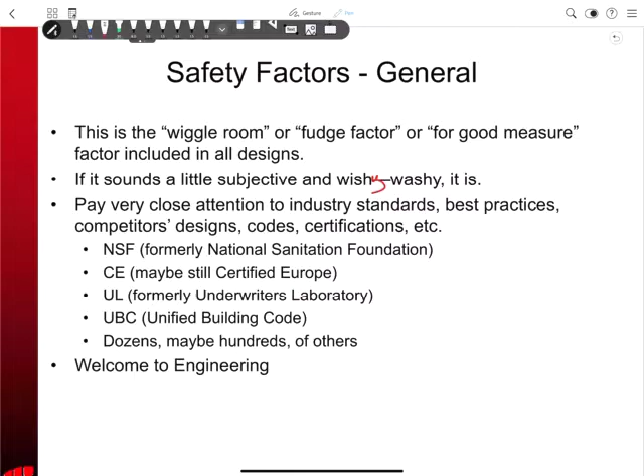Some places to look. NSF, it used to be called the National Sanitation Foundation; things that could make you sick are kind of governed by the NSF. CE, Europe has their own thing for being certified safe in Europe. Underwriters Laboratories, kind of the equivalent here in the States. Unified building codes, right? They used to vary from county to county, state to state, but now across the country, the building codes are all kind of unified. And there's dozens, maybe hundreds more. So if this is overwhelming or scary or not concrete enough to you, welcome to engineering.

In engineering, there aren't always right answers. I try to stress that in video number 1. So you have to do the best you can, justify the decisions you make, document the decisions you make, document the mistakes you make, right? This is all critical. All right, good. Next slide.

Safety factors, selecting the safety factor, right? The first thing is the degree of uncertainty on the loading. Now, the example I always like to use are the old piers down at Memorial Union, Hoofers Sailing Club. They were designed and built by some engineering students years ago, a bunch of volunteers. They said, well, how many people are going to be on this pier on a busy, beautiful Sunday afternoon in the middle of July? Sure, there could be 20, 30 people on this pier. And so they designed the pier for 20 or 30 people. This is the worst case scenario on a busy Sunday afternoon, right?

But what they didn't think about is 4th of July. Everybody goes down to the Union to watch the fireworks. And where's the best place to see the fireworks? They packed 300 people shoulder to shoulder, crammed out onto the pier. The engineers didn't think of that. They thought about what's reasonable. People aren't reasonable. And of course, I shouldn't laugh. The pier collapsed, and I think a woman broke her leg. One kid fell in the water, almost drowned because they didn't know how to swim, but yet they're standing on a pier. No PFD. So there's a degree of uncertainty in the loading.

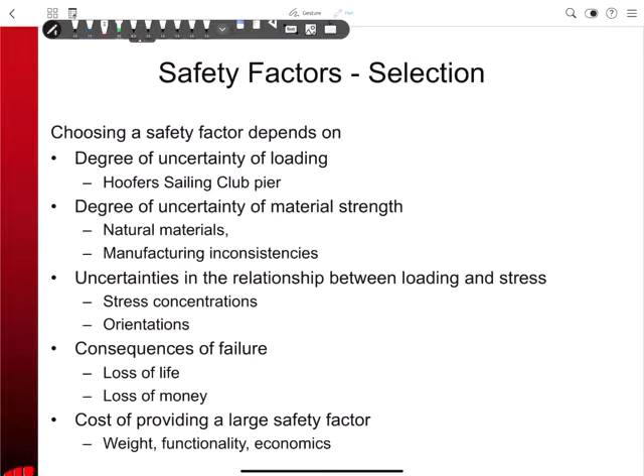And now here's another important one, the definition. Now the definition we've done so far is, N is the material strength. So this is kind of the way the engineer looks at it, the engineer approach.

I say, well, how strong is the material, and what is my expected stress? And hopefully my material strength is greater than my expected stress, so I have something greater than 1. Okay, good. How much greater than 1? I don't know, let's say 40%, right? So a safety factor of 1.4, because that's the strength compared to the stress.

But there's another important way we have to look at this, and that is the safety factor from a user standpoint, right? What I mean is the load to just cause failure compared to the expected load. And it's like, well, that's the same thing. Right, let's see if we can come up with an example that's not the same thing. As long as we're kind of on an automotive theme today, how about if you have an energy absorption, so here's a brick wall and this is a car. If it's not obviously a brick wall and a car, that's what it is.

There goes, you see the lobster boat out there? Yeah, there goes the lobster boat, going out to get some dinner.

So here's this car, for that matter, maybe a boat, I don't know. And here's a brick wall. And I impact this, and there's a certain amount of momentum, kinetic energy, whatnot, and then there's going to be certain stresses on the front end of the energy absorption portion of this.

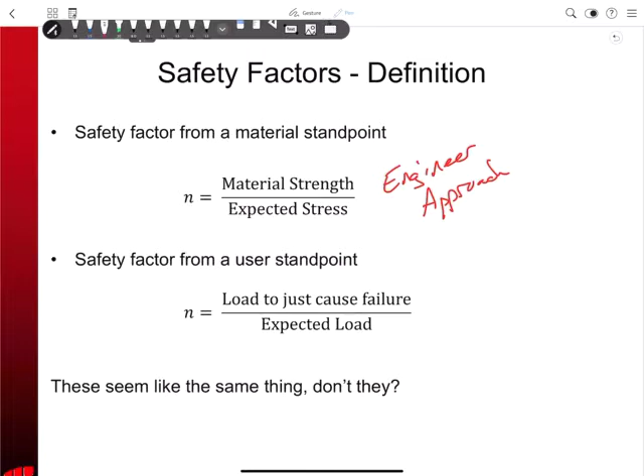Okay, so that's something that most people don't really think about a lot. But the user, they're thinking speed. The engineer is thinking about stress and strength, right? So they're not the same. You have to communicate very well how you're defining the factor of safety.

Okay, so now let's get into a little bit here. We've got this safety factor of a diving board. So we've got the board cross section here. So if I were to draw, let's do this in black maybe. We do this, out here and here. How wide is this thing? 50 centimeters. And then it's 8 centimeters thick here. And then the 100 kilogram engineer stands at the end, right? It's nice that I'm 100 kilograms because it makes really good props. So this works out to be 980 newtons.

They're standing down there, and then I do a moment balance. So this is pushing up. How much? This is pushing down with 980, right? And so everybody should be able to do this by now, and discover that the force at the roller is 3,400 newtons. Whoops, get back there. So F equals 3432 newtons, right? And then we take the 980 times this 5 meters, and then we get the moment about the roller.

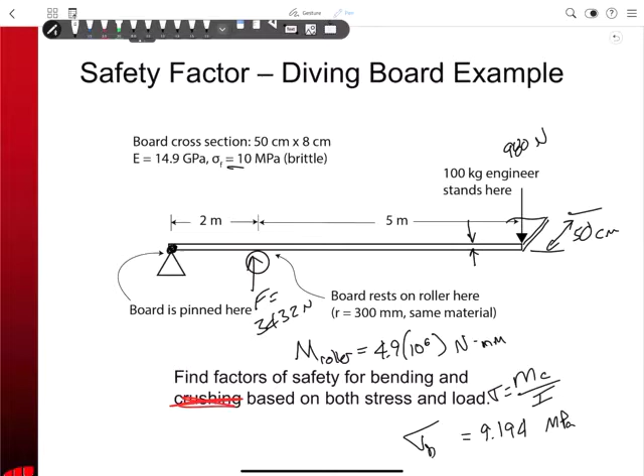Do I have an MC over I? And the bending stress works out to be, what does it work out to be? 9.194 megapascals. 9.194 megapascals. All right. So that's the bending stress. So sigma bend, right? Okay, so bending stress is that.

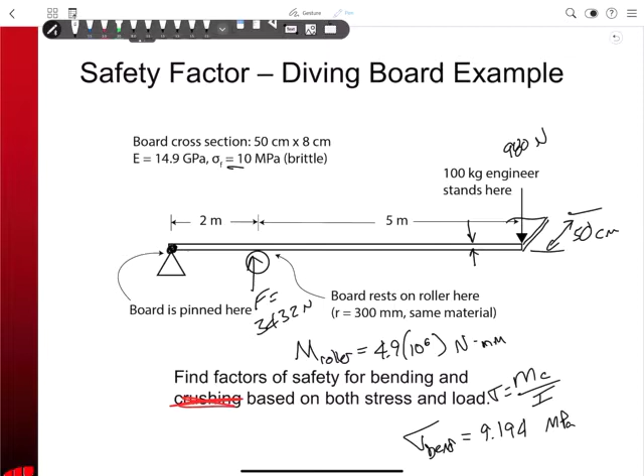And I look at this 10 megapascals versus 9.194 megapascals, in the back of my mind I'm thinking, this is not the best diving board. But, right, it's less, right? 9.194 is less than 10, so this thing should be fine. All right. So let's go here.

So we discovered that this diving board is in fact safe because it's only 9 point something for bending and it's 10 for fracture, so we should be fine, right? But there's always a but in engineering. There's always some unknowns. You're engineers, not scientists. Not all engineers are 100 kilograms. In fact, most of you are probably not. I should not be 100 kilograms. I should be less than 100 kilograms. There might be more, right?

So the mean, mu is mean. This is the Greek letter mu for mean, which equals average, right? The average engineer is 100 kilograms, but there's some standard deviation of the engineer. So this is standard deviation. The standard deviation of an engineer might be 12 kilograms.

Okay, and then the fracture strength of the board, sure, the average board is 10 megapascals, right? But there's also some standard deviation to the strength of this board. It might be made out of wood, right? And trees, natural fibers, are somewhat unknown. So we have to consider that there's variability in engineers, or divers, swimmers, recreators, and there's variability in the diving board materials, right?

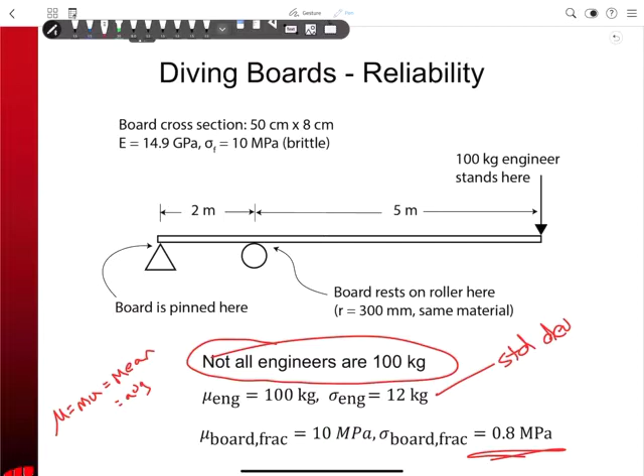All right, okay, good, I almost tipped over. I'm standing on really wobbly rocks here, so I just about lost it.

So for here, we need this to be greater than 1. Right? It needs to be at least as strong as it needs to be. And then this just has to be positive. Right? My strength has to be greater than my stress. So the margin of safety just needs to be positive. The factor of safety needs to be greater than 1. All right. Now, a quick little review on the normal distribution.

This thing here is the mean. Right? The mean is there. That's the most likely one, the one that happens the most. Well, in this case, the mode and the mean are the same. But that's the average, right? And then the farther out we go, so if I'm 1 standard deviation above, that's roughly 34% there, and then 2 standard deviations is another 47%, blah, blah, blah, and this keeps going up.

So this picture tells me how likely is something to be, for instance, 3 standard deviations above the mean? Not very much, right? So Olympic athletes, professional athletes, Nobel Prize winners, they're all like 3 standard deviations above the rest of us schleps that are just trying to get by. And then, of course, there's some things that are way below, right?

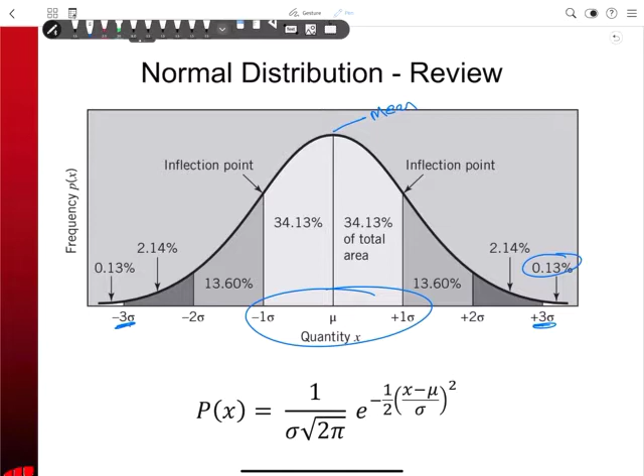Something that's just bad luck and something failed because it happened to be 3 standard deviations below whatever the mean is, right? But most of us live right in here, plus or minus a standard deviation in most aspects of our life. 68% of people on all traits are between plus and minus 1 standard deviation. All right, so hopefully you remember this from stats, but it's a nice little review.

Next one. Okay, so now we're going to treat the margin of safety as a normal variable. So now that I'm looking at this, it seems like we could have done a better job. Let's look at this one. Okay, so the margin of safety, Z, we know that the mean margin of safety is just the mean strength minus the mean stress, right? That makes sense.

But this is mind-boggling to me here too, that the standard deviation of the margin of safety works out to be the sum of the squares of the standard deviations of the other 2 things. Okay, and I'm going to work through this example, so hopefully this makes more sense, right?

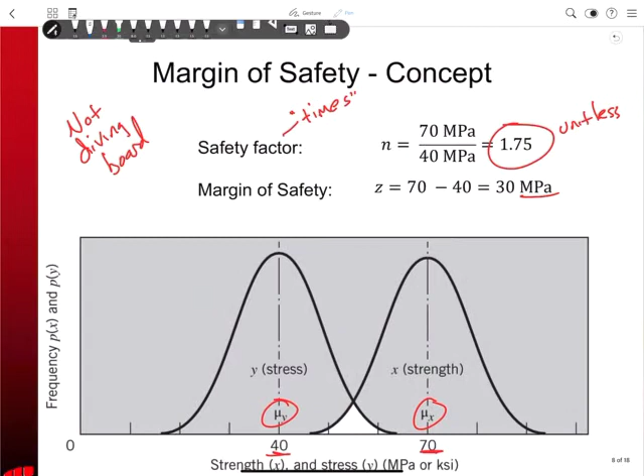So if we look back here, we saw that in this example, the margin of safety was 30, right? I don't know much about the standard deviations here, but then I go forward to here. This is the mean margin of safety. Of course, there could be some margins of safety that are really good, and there could be some that are less than that, right? In fact, what happens when the margin of safety is down here? What does that mean?

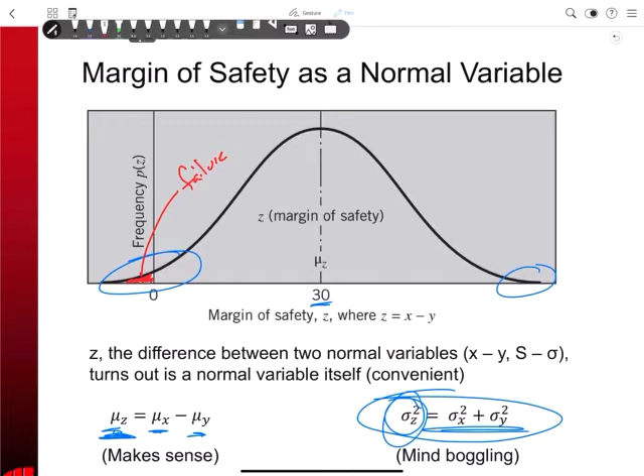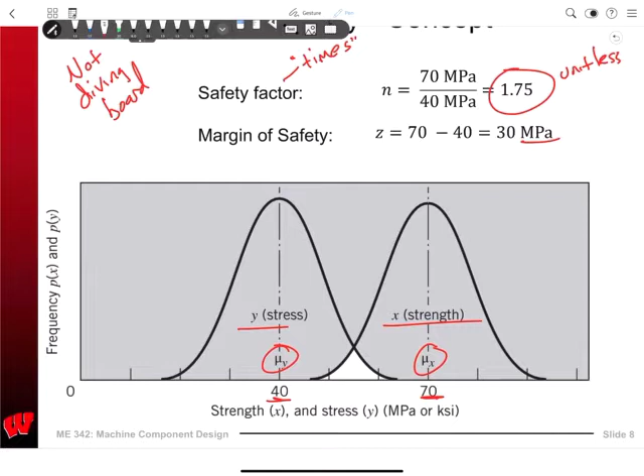When the margin of safety is down there, oh, that's bad. That is failure, right? It's just bad luck. Bad luck, because here, now, what the heck? This made total sense when I was putting this together. Oh yeah, so this is the case where I just happened to get a weak thing and then a heavy load, and they crossed and it broke, right? So that's what happens when the margin of safety goes red, or when it goes below 0.

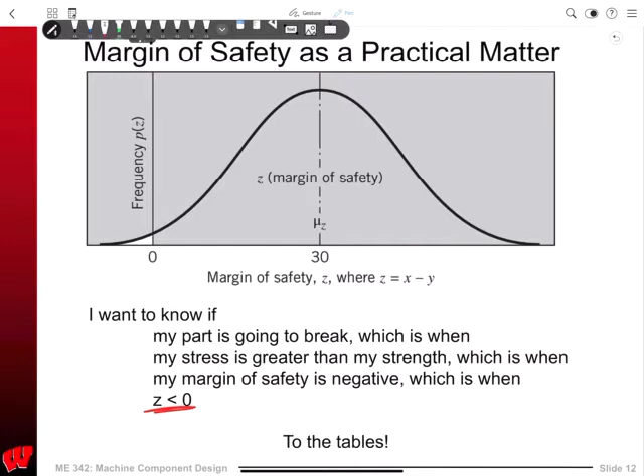Okay, so I want to know if my part is going to break, which is when my stress is greater than my strength, which is when my margin of safety is negative, which is when the margin of safety is less than 0. Okay, so we're not quite ready to go to the tables yet. We still have to work on this a little bit. Not all engineers are the same. So I've given some standard deviations here, and I've given this. So let's take a look.

My standard deviation, and because sigma shows up for stress and standard deviation, my standard deviation for my margin of safety is going to equal the square root of the standard deviation of bending squared plus the standard deviation of the fracture strength squared. Okay. So I need to know the standard deviation of my bending stress. That's a little bit inconvenient because I know the standard deviation of the mass of an engineer. I don't know the standard deviation of the bending moment, right?

But fortunately, the bending stress, sigma bend, is directly proportional to the mass of the engineer, right? So that means that the standard deviation of the bending stress is directly proportional to the standard deviation of the engineer, right? So then I can write that the standard deviation of the bending stress is going to equal

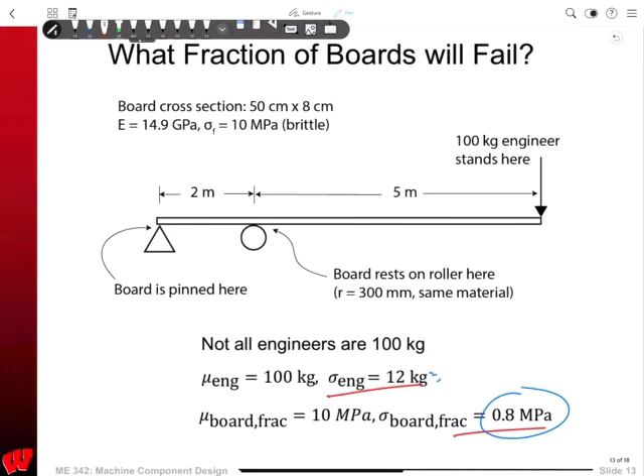My standard deviation works out to be, what is this? 1.363. And that's my margin of safety, so that's megapascals. Okay. Oh, so now this is getting to be a little bit interesting, right? So my mean margin of safety, where did that go? Is 0.8059, right? But my standard deviation of the margin of safety is 1.363.

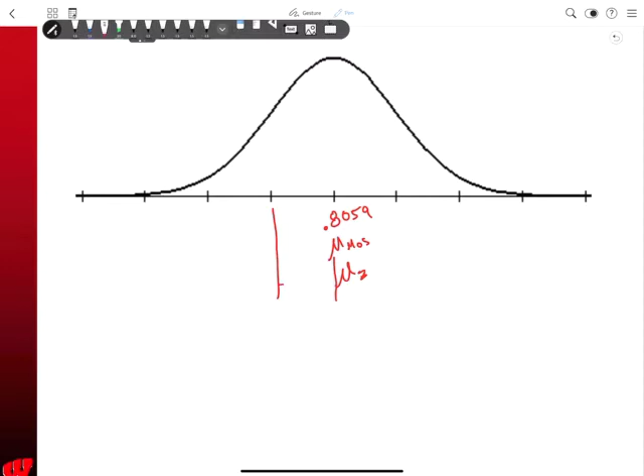Okay, so what does that mean? That means that my mean here is 0.8059. Right? Because that's my mean margin of safety, or my mean Z, okay? But I have to go only one standard deviation below this distance right here. This distance right here is the standard deviation of my margin of safety, which is 1.3.

I should have done all this in blue. What does that mean? So it's 0.8059 in the middle, it's 1.3 there, which means that all this stuff over here is a failure. This is all red. Right, because here's zero. Wow, so a lot of these are gonna fail. How much of these are gonna fail? Well, we gotta look that up, so we gotta go to the tables for that.

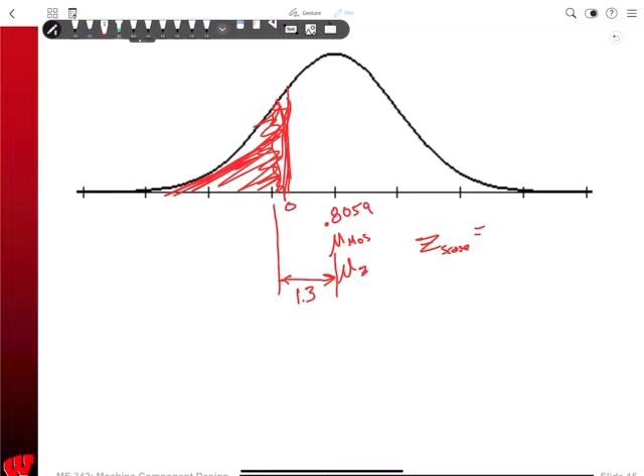So what this table shows us is what is the shaded area, right? That's what this table answers. But it's given in standard deviations, which I didn't figure out yet. Okay, so I know that my margin of safety is only 0.8059. So I need my z-score, which equals 0.8059 divided by my standard deviation, which is 1.363, right?

So my z-score is only, let's see, where did I write that down? Oh, I didn't write it down. So it's roughly 0.59, I think it was. I think it equals 0.59. Can't believe I didn't write that down. Okay, so I have only 0.59 standard deviations below my mean margin of safety before I get into the negative margins of safety, which means it's going to fail, right?

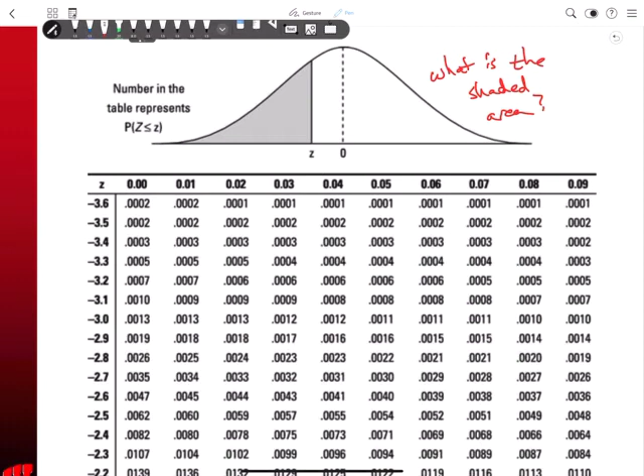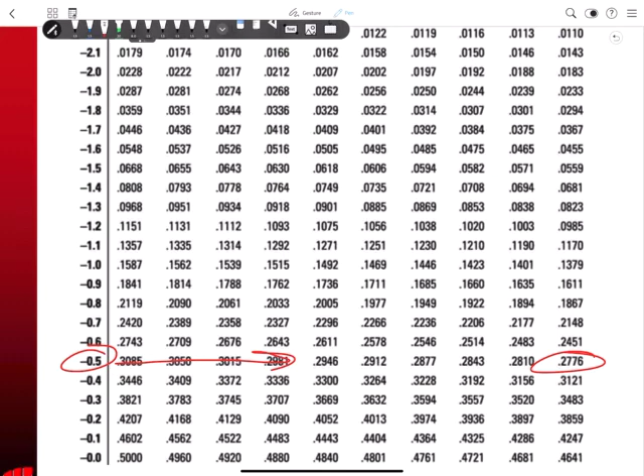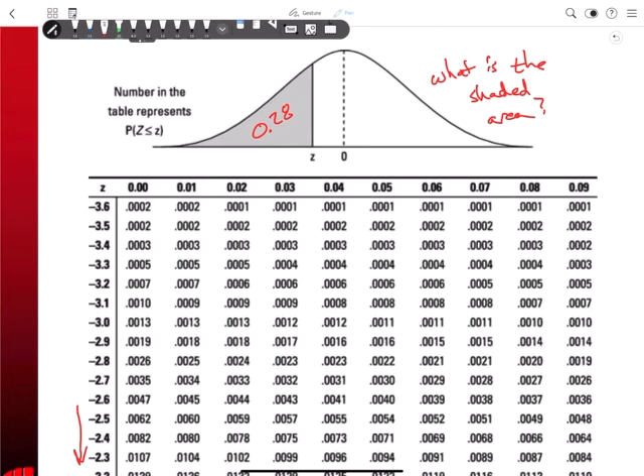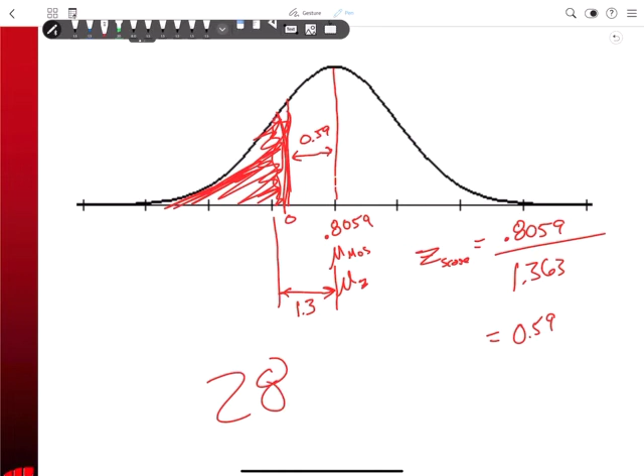So where is 0.59? Oh, it's down here somewhere, so maybe on the next page. Oh, sure enough. So here's 0.5, and then here's the 0 and 9, so I go down here and over here, and then I get this. Wow. What does that mean? This is the area of the gray region, 0.28. 28% of my margins of safety are going to be negative. That means 28% will fail. 28% failure, right? That's terrible.

Now, I'm a practical engineer, but I understand that 28% failure is not good enough. All right, I'm not going to do this example. So, a little heavy on the math there. There's a lot of statistics. Hopefully that's stuff that you remember from your statistics class, 224 or 324 maybe. But it's critical, right? The math is not hard. Figure out what the mean margin of safety is. Figure out what the standard deviation of the margin of safety is. Figure out how far you can go before it becomes zero. Absolutely critical. So part of your homework is something about snowboards, right?

I one time had a full spiral fracture on my tibia due to a failed snowboard landing. So it's kind of, well, not near and dear to my heart, near and dear to my leg.